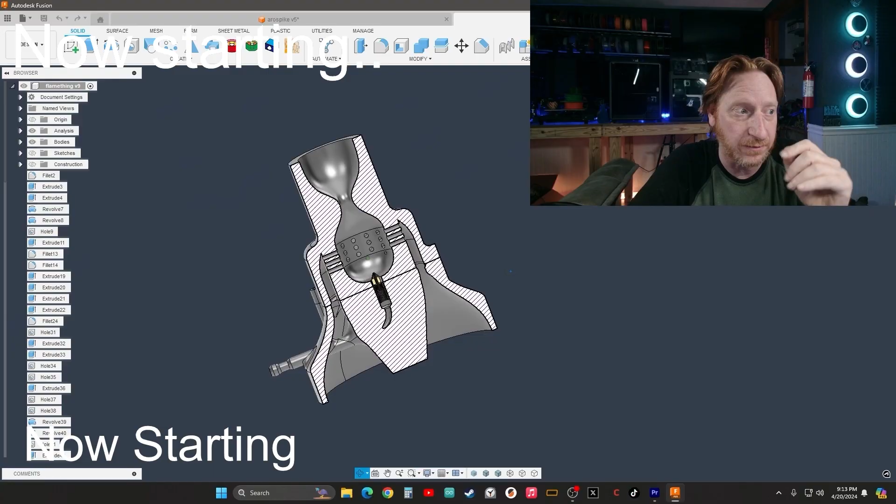Nozzle heats up and the plastic it flows, a creation takes form as the live stream goes. Heart of a maker with a tech-savvy show, designs in the making, see the hotbed aglow. It's shenanigans 3D on the digital stage, with each layer printed, he's the maker, the mage.

Spinning gears, let's start the show. Layer by layer, we watch it grow. A twitch in time with shenanigans flow, chaos reigns with a fiery glow.

Closely as the filament spins, a wild ride where the line between fails and wins. Accidental art when the plastic rebels. Shenanigans 3D, he's breaking all the levels, on the edge of tech, where the sparks may fly. In the streamer's den, there's no limit to the sky.

Every stream's a gamble, roll the fiery dice, pushing limits, bending rules, not one to think twice. Heartbeat pulses with each bridge he creates, while the chat's wild wonder in suspense they wait. Rising with the flames in the shenanigans game, printing out the future, no two prints the same.

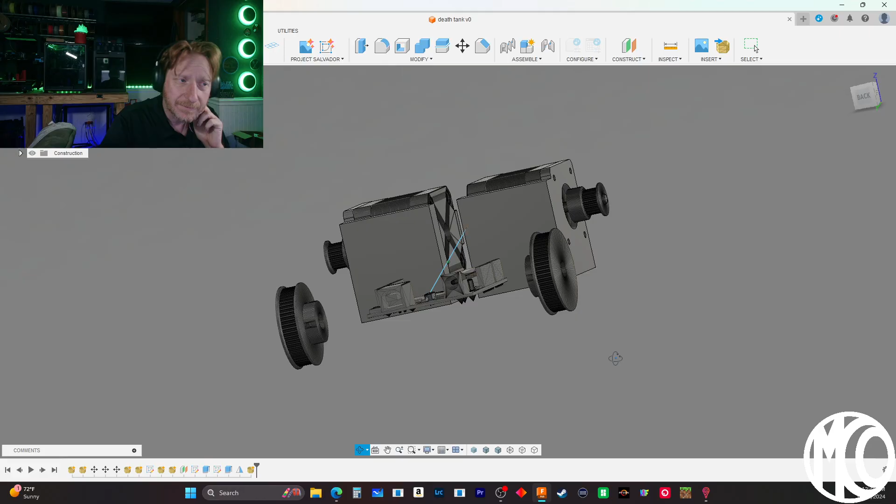So there's two variants I want to do here. This will be for the stepper. I don't know if we should use steppers or not. I'm questioning if we should use steppers for the drive system. Like, what's the point of the stepper? The point of the stepper is to be precise, to precisely control a motion, right? You really can't do that with DCs unless you have some kind of a reader on it.

So using a stepper for our application here, is that extremely overkill? What benefit do we have with using a stepper for the drivetrain? That's basically what we got to figure out.

We could use... let's see if I can... I really wish my homepage wasn't full of celebrities. Junk. Let's try, let's see here, 93. Oh, I don't want to take that whole thing. Pardon me. So what if we use something like these?

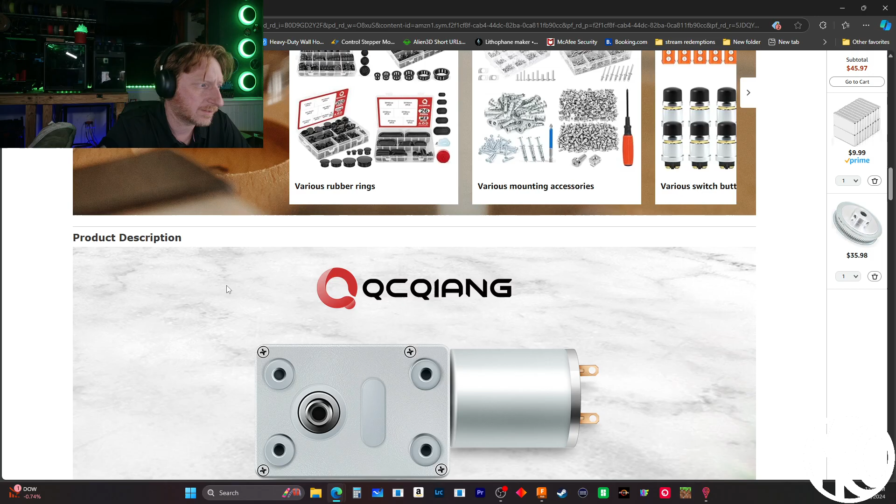I know I want to get... I don't care about packaging. I want to see what we could use, one of these, two of these. I want to know what that shaft size is. I want a description, please. There is no description.

So we can get two of these for 20 bucks. It's not bad.

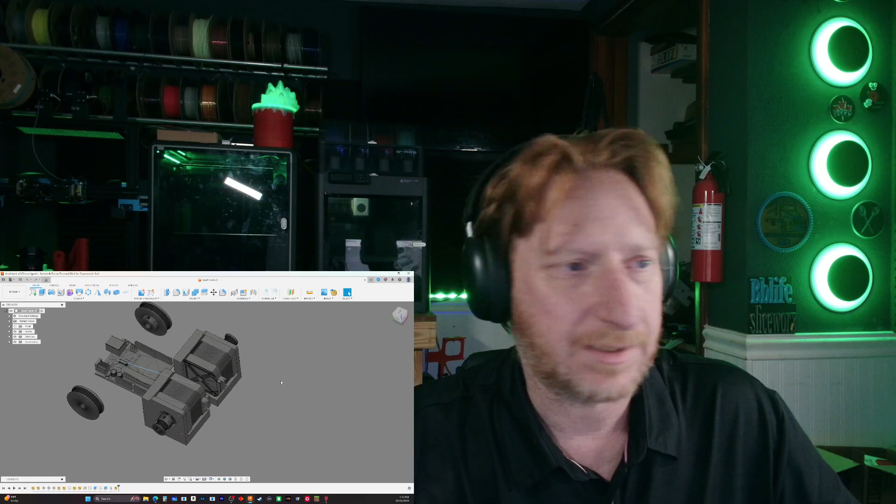We need to go to the big screen. We're gonna need to change things, aren't we? This whole design completely went wayo. So we're gonna start a new design, I guess.

Yeah, I tell you what, you don't even want to know how much I spent on this train layout a few years ago. That was ridiculous. I didn't hold back. It wasn't some kind of toy thing.

It was a full-blown model train layout, hobby level. It's all on my YouTube channel, there's several videos of me putting it together. Those trains are not cheap. Those locomotives are like $200+ each, and I got 2 of those, and the track for the trains I probably had maybe $150 worth of just track. It's just a simple train crash channel.

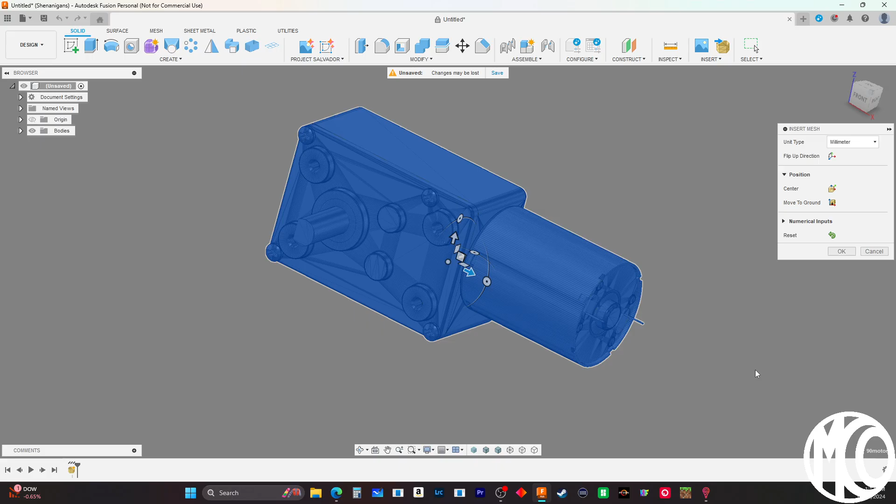Okay, I think this motor's shaft looks like it's centered. So we got one centered here. Let's move.

Do 300 in sales a week in January. Yeah, oh God, I don't know how you'd live off of that. Definitely have to save throughout the year for that, huh?

Oh, we're centered, yes we are centered. Let's go for the top view. That's our right, that's front. So if that's front, this needs to be changed here to 90 degrees.

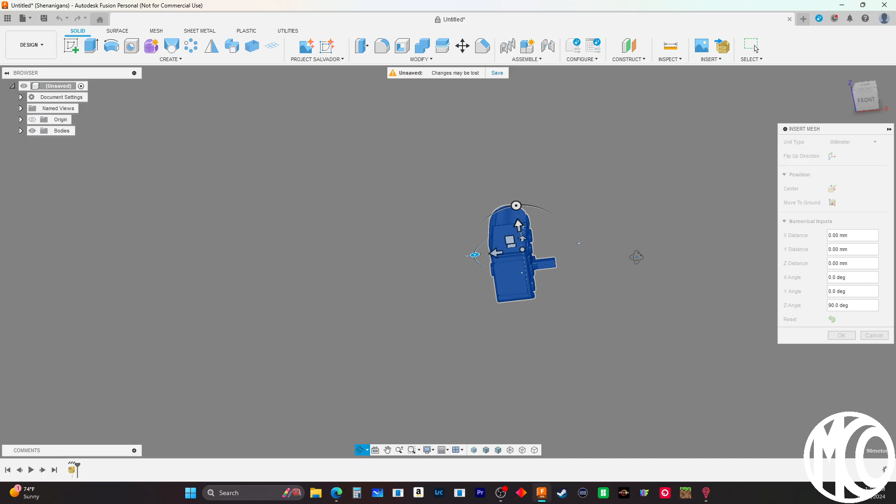Wait a minute, I'm getting confused here. Because we're not using belts now, so this needs to be like that. It needs to rotate this way.

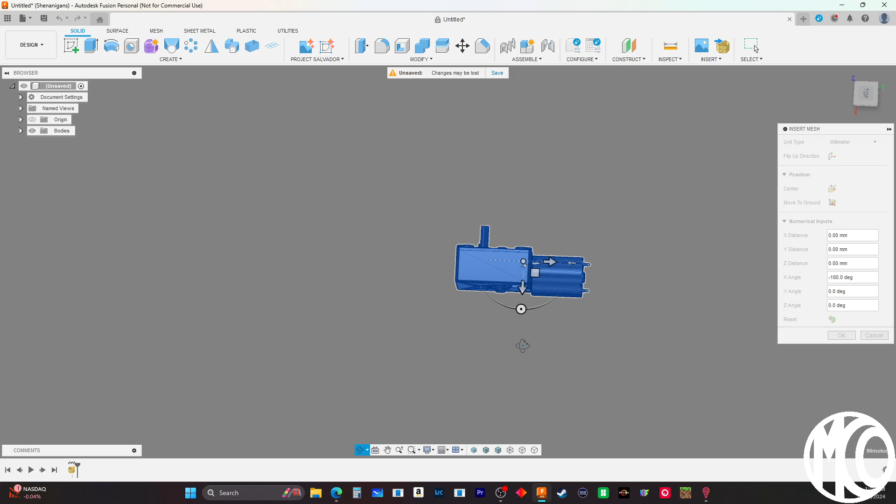Yeah, I do the same thing too, I prepare for downtime, which is what I'm doing, like what I've been doing these past few months. This last month I've been preparing, usually October, November, and December I start preparing. That's why I keep saying budget's a little tight right now.

All right, what am I doing, I'm confusing myself here. Oh, this needs to be this way. That's what it is.

Crops didn't do well for you. Humbler John, my friend, how are you? How was your weekend? Yeah, unfortunately, we didn't make it down that way.

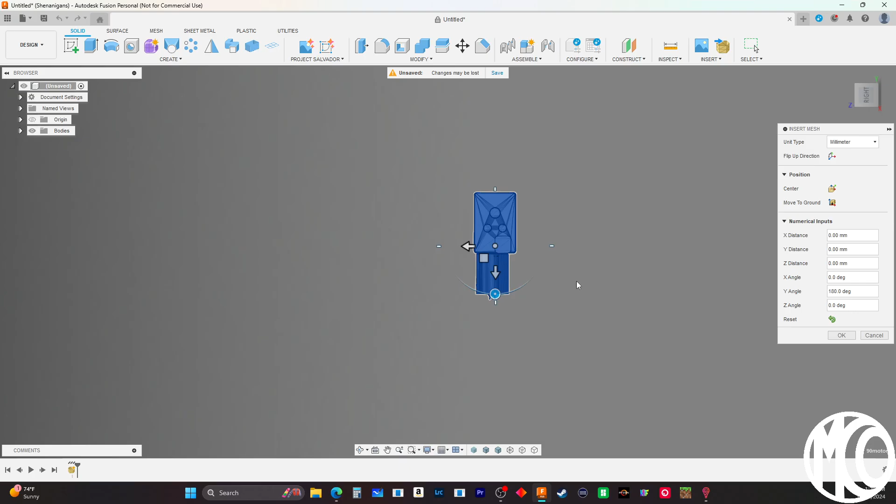Okay, so there, we're good on that. Let's move this over. Let's move this 40.

Oh, Rexy, hey, how you doing? Still 3.5 hours away from Atlanta. Well, have a safe trip, I hope it was a blast for y'all.

We are redesigning - this is the third design now that we've done for our tank, but this is a community effort of parts and electronics, and this is what we're going to be taking around to shows for 2025. It is an absolute blast. That Ren Fair, behind the Ren Fair there is a facility, and it's one of my customers I go to. That is awesome, glad y'all had a good time.

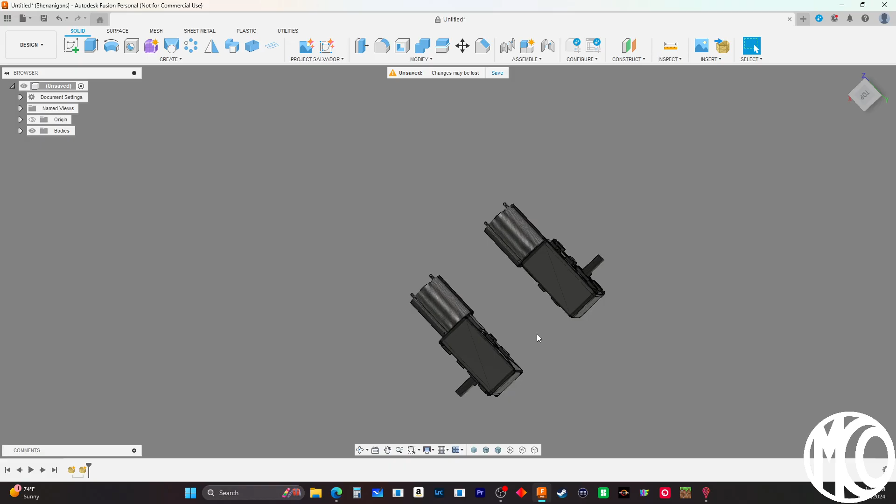Yeah, I kept getting text messages from their Discord saying that people need rides. Someone needed a ride to Philly to catch a Greyhound, and it's like, yeah, I've been there, done that.

This is going to be interesting to figure out how to mount this. I guess we have screws here. So what's our distance overall from shaft to shaft? 121 millimeters. Let's get a spring up, GrabCAD again.

And this, download the Raspberry Pi model.

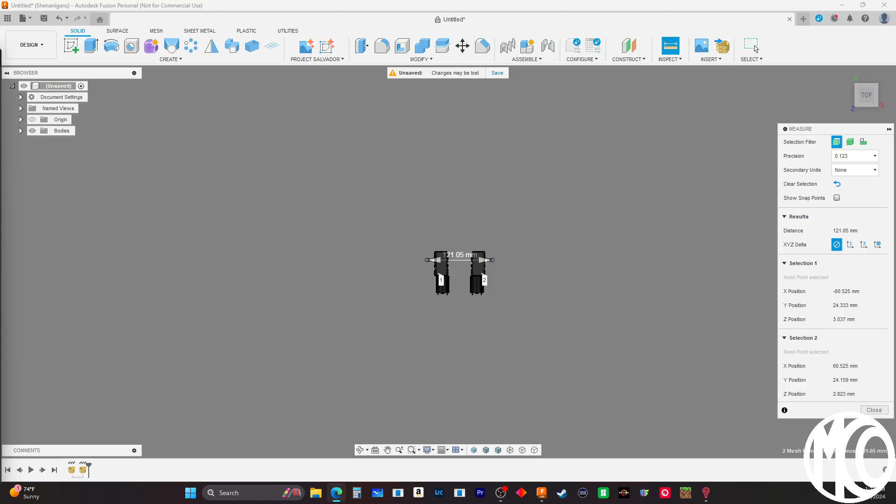This will work. I don't need anything fancy. I just need it to.

Printopia is your goal for next year, huh? I'm gonna have a table next at Printopia. That's the idea, it's a plan. Share a table with Billiverbot. There's talk about that, so we'll see what happens. I would definitely do that.

To Raspberry Pi 3, and this is one of the reasons why I want to get this done, so we can take this there. Open this file up.

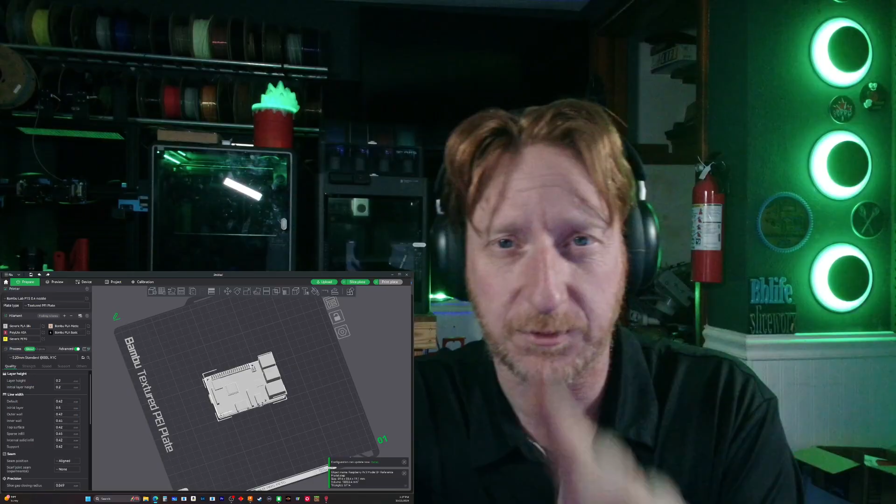How much is a Raspberry Pi 5? I was looking them up, and I was finding them for around 60 bucks. 60 bucks for the Pi 5, and then for the AI hat was around $60. Here, let's look it up. If you go through the Raspberry site, whatever it is, versus if you go through Amazon, you're paying like $100 for it.

Yeah, if you... where was I seeing that at? Here's $80 for one. DigiKey has them for 60 bucks right here for the 4G, the 4 gigabyte ones. That's the one that we're looking at, that I was thinking about getting.

The other thing I want to search is... yeah, this does not look like what I was looking at before, but maybe this is just the bottom model, I don't know. But here's 28 bucks for this Seeed powerful RISC-V-based hat, it enables AI in Raspberry Pi, and it's ideal for AI vision projects.

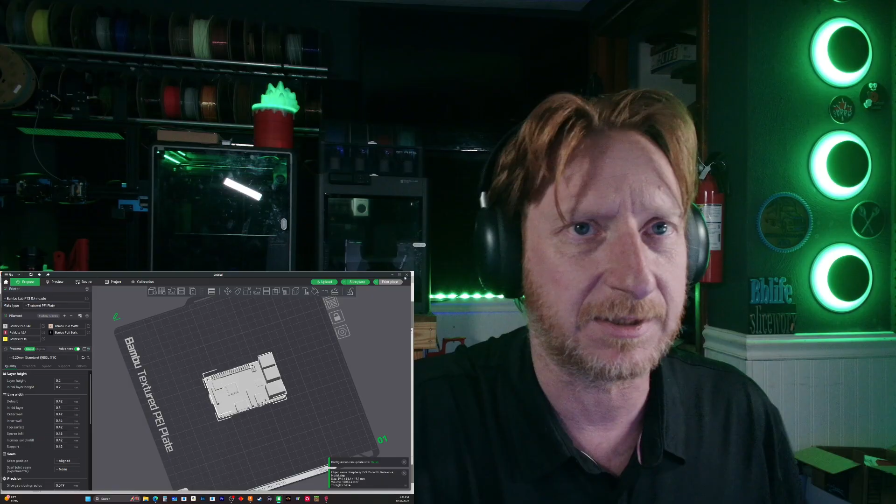You know, I thought those LiDARs were going to be very expensive. I found one for $50. That's still quite a nice chunk of change - two rolls of filament, possibly three. I thought they'd be like $200 or $300. Just five years ago they were like $100K. I know, right? I found one on Amazon, I don't know how good it is. I do use LiDAR, I've used it before. I got some on my quadcopter actually, so I've played around with it and it does work.

Oh, so here's a LiDAR module. It does work - I can hug the ground when I have this turned on. When I'm running autonomous with this on, it'll sit there and actually follow the terrain. There's a slight delay, but it'll follow the contour of the fields, going up and over. Oh, my cat is in here. Hi kitty cat.

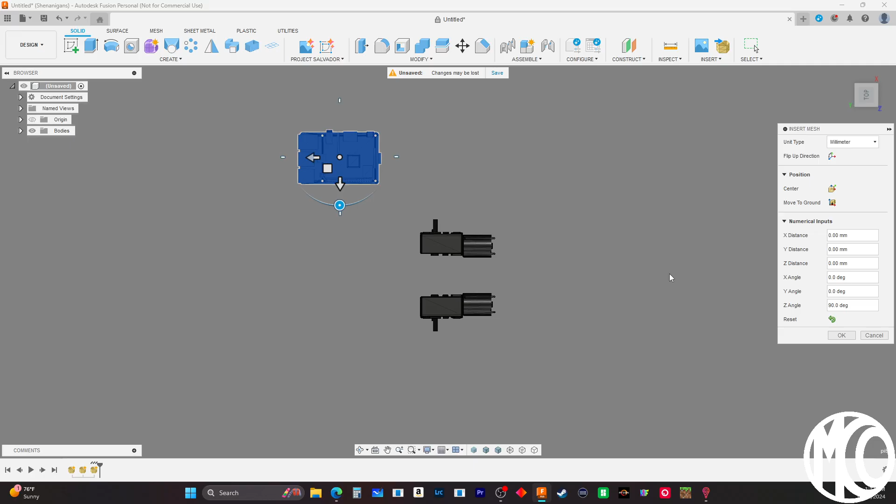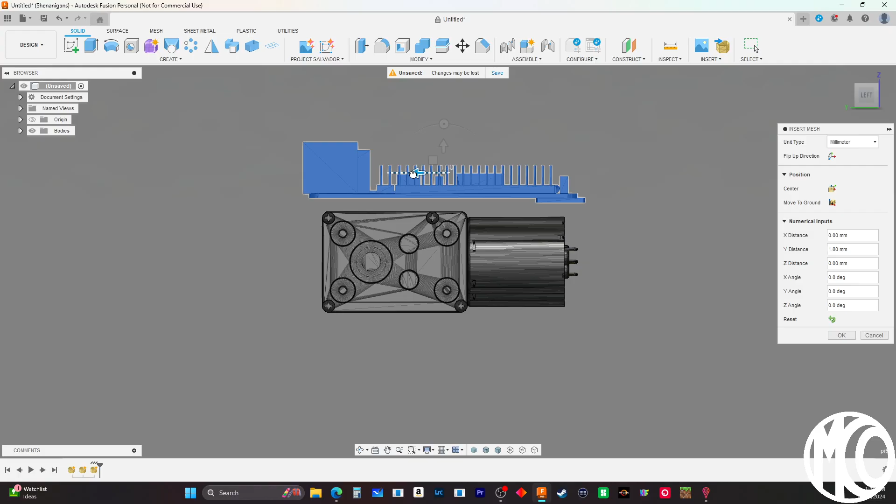I guess we could have the motors mounted on the bottom. We can raise this up, have a mount up here. The motor - this is one thing you've got to think ahead about when doing these designs. Now, I'm not an expert by far, just a truck driver that comes home and plays on the computer, streams it, and prints it.

But you've definitely got to think ahead here, because if we put something here to mount this, and this is the bottom and these are the sides, we can't just put an object right in this area to hold it up. We'd have to make sure it's small enough to allow these motors to move out this way and then back, because that's going to be underneath. We're not going to be able to pull these motors straight up because the shaft goes through the body right here. So when we unscrew this, the motor needs to be moved inward and then removed out like this. You've got to think ahead like that.

I was watching this one YouTube guy maybe a year or so ago who did that exact same thing, but with a different style of motor. He designed everything, put it together, 3D printed the body, and then couldn't get the parts in place because he hadn't allowed for what I was just describing. He wasn't allowing for that, so he just designed it, and then had to completely redesign the whole thing - he showed it too, saying 'I messed up' and showed what he did.

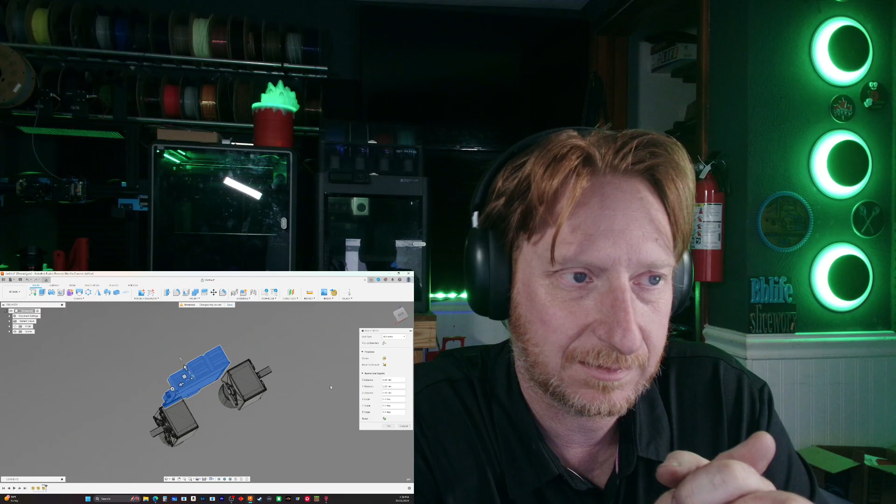Yes, I think we did. Why did we move away?

We didn't really fully move away, I don't think. Maybe we did. Why did we start designing this? Oh, we were talking about the advantages of the stepper. What is our... I know it's a Monday. All right, it's just a Monday. I haven't had much coffee.

What is the advantage that we have with a stepper as the drivetrain? Besides me already having them, what would we benefit from it? It would be precise. What would we benefit from it, though? Oh yeah, definitely highly accurate. We'd be able to park this thing anywhere.

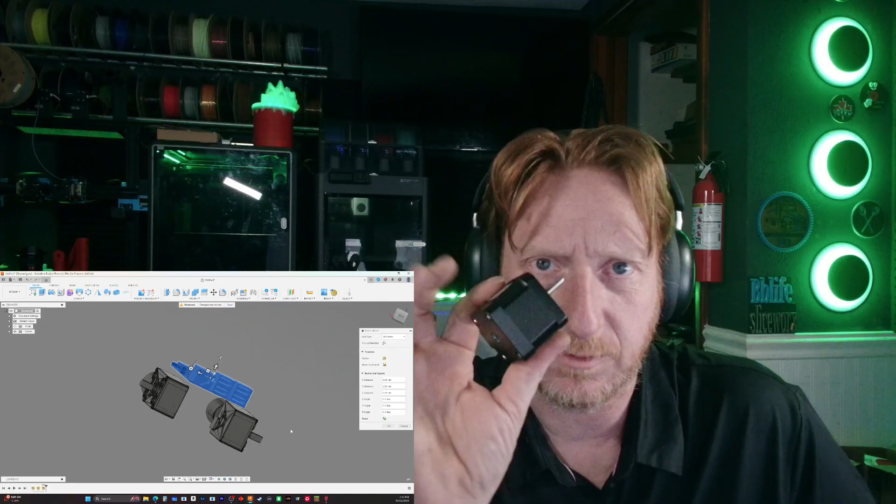One thing I do see being beneficial if we use this with the robotic arm, since the robotic arm does not pivot at all - all it does is fold up. Basically, think of your shoulder as being precision control. Precision control is what we would do with this.

So the robotic arm is basically going to have two arms on it. It'll move up - we'll have the boom that goes like this, then we'll have the boom that goes like that, and then we'll have the grabber. The grabber will be able to go up and down like that, sideways pinched like that, but able to go up and down.

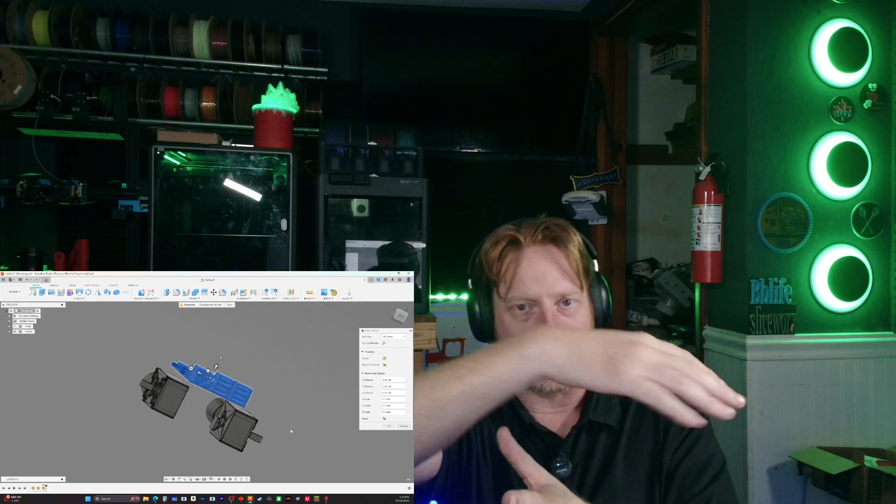In order to move that robotic arm to pick up a can that's over here, we'd actually have to turn the entire body of the machine, because the arm's not going to pivot. So the entire body needs to turn, and that's where the steppers would come in awesome for that - we'd be able to precisely move that.

If we go this route, we would lose that precision. And then our motor shield - one of the motor shields I was looking at, one of the H bridges - the H bridges I've been finding will control 4 steppers and 2 DC motors.

That bridge will work on this model right here that we have in front of us, because for our arm we have 1, 2, 3, and the pincher 4. The arm will have 4 steppers on it and 2 DC motors, if we go with these motors right here that we're working on.

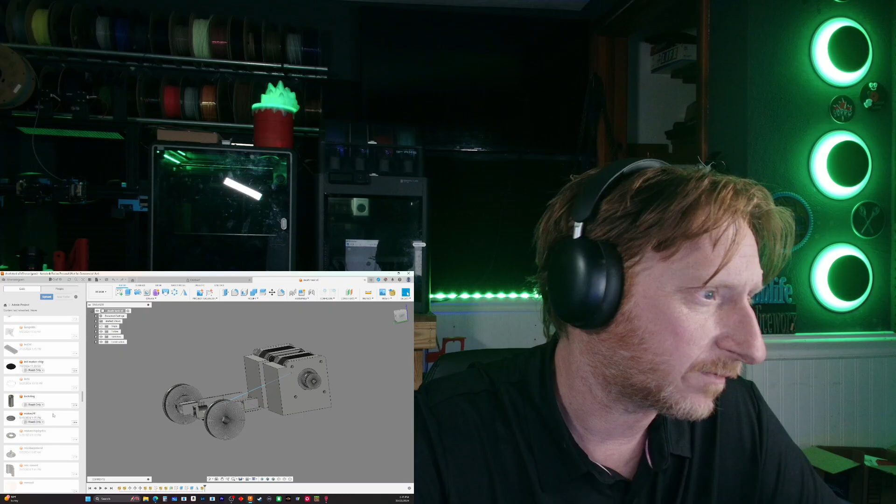If we go back to the Death Tank design, this one right here, okay - the one that we started with. Oh no, this is the second version. Where is the other version? I'll show you the first version we started with. So this is version number 2. Here. So this is the first one.

And I was going to use these little guys, but then I know for a fact that these are not torquey at all, because I can stop them easily with my hand. Yeah, more torque means more weight. Yeah, that's just like a bigger battery equals more flight time, but it also adds more weight, which reduces your flight time on anything like quadcopters.

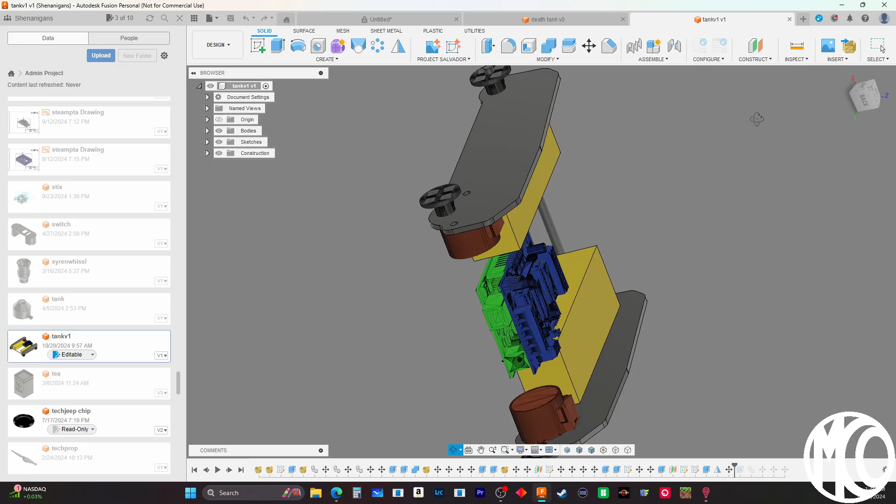So yeah, this was the very first one that we started, and then I started thinking about it - it's like, no, I don't really like using those. And those are the batteries, but yeah, I don't really want to go this route. So then I started working on this - this is with the steppers. Now the steppers are going to be reduced, so we do have a reduction here. And actually this one, which we just started today, uses that.

Should we go with the stepper motors? What do y'all think? All right, let me...

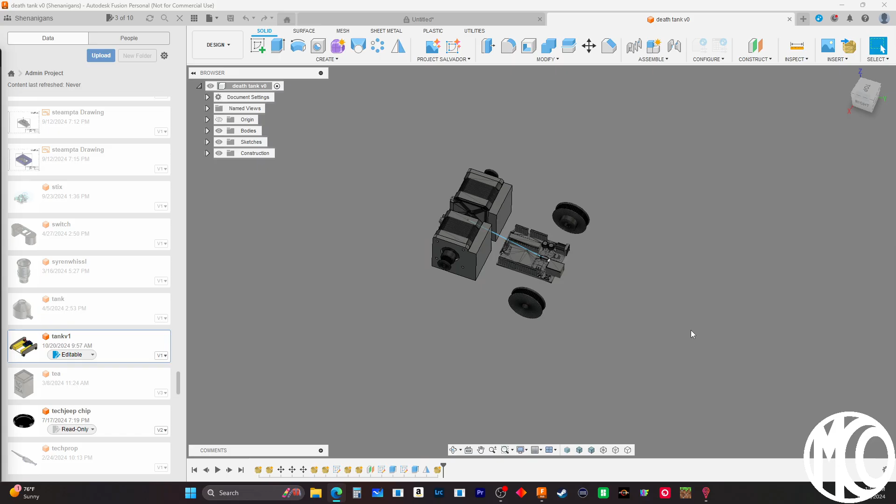So we have a current poll, DC or a stepper? We'll let that run and check what y'all say. But I think what we should do right now is something that's bugging me. I wanted to put a belt on here, and we will do a belt.

We should do the belts. Let's get rid of all these bodies so we're not confused. Got that pulley and that pulley.

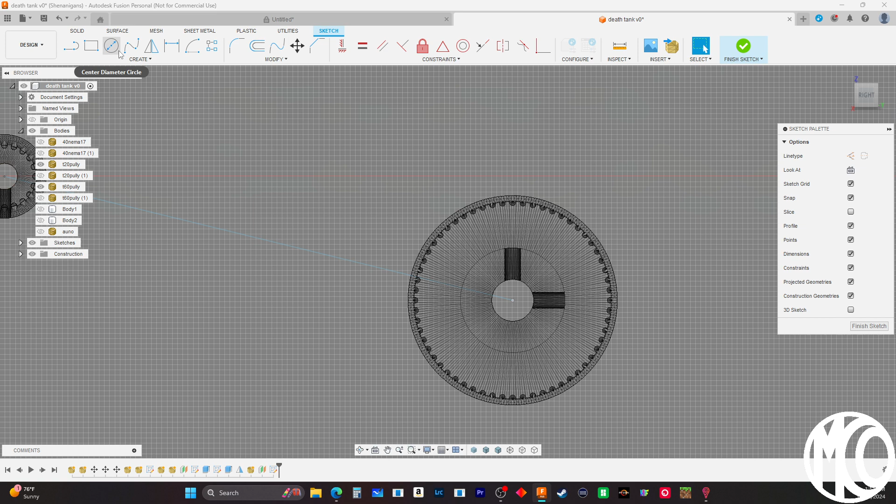Okay, we'll design the belt. That's good enough.

I'm not really sure how to do this, to be honest with you. So I think I want to run a parallel line from here to here.

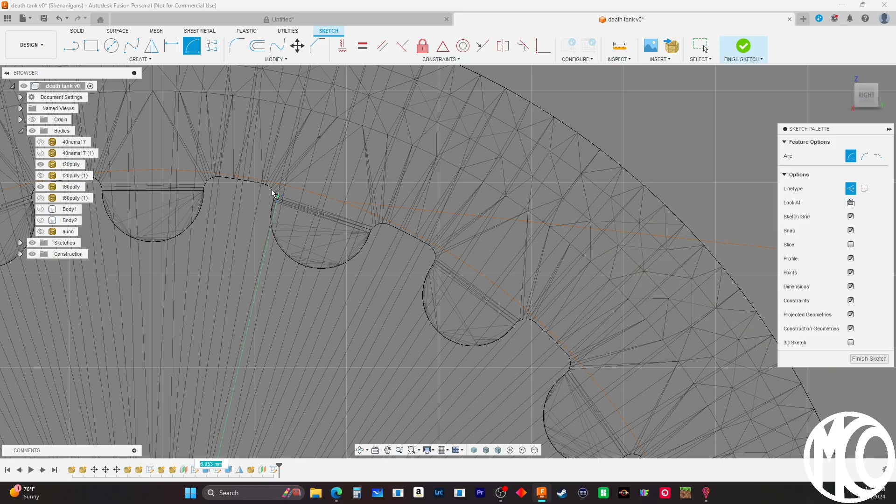We're just gonna fudge it. We're just gonna eyeball it, that's all we're gonna do. I'm not really too concerned how it looks, I just want it to be in there for aesthetic reasons, I guess. So we'll do that down there.

That was supposed to be, let's backtrack on that. And this is this.

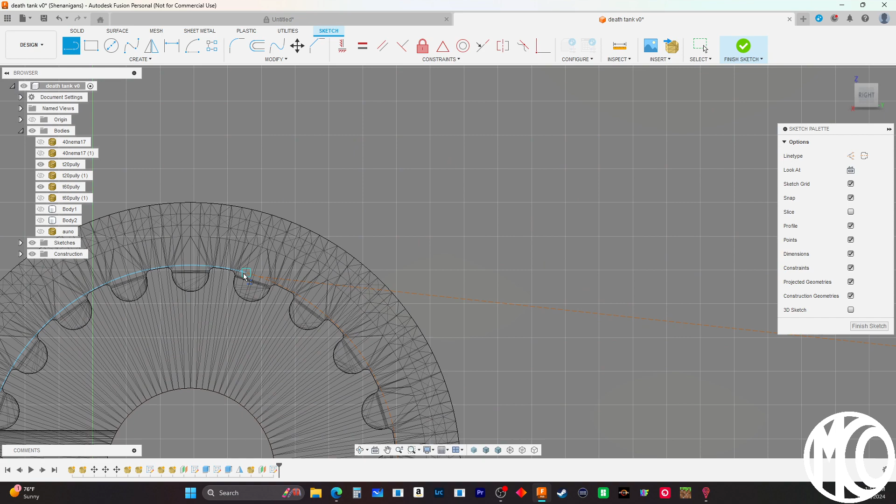We could do the math to do it and make it look right, but yeah, see, this needs to be moved up.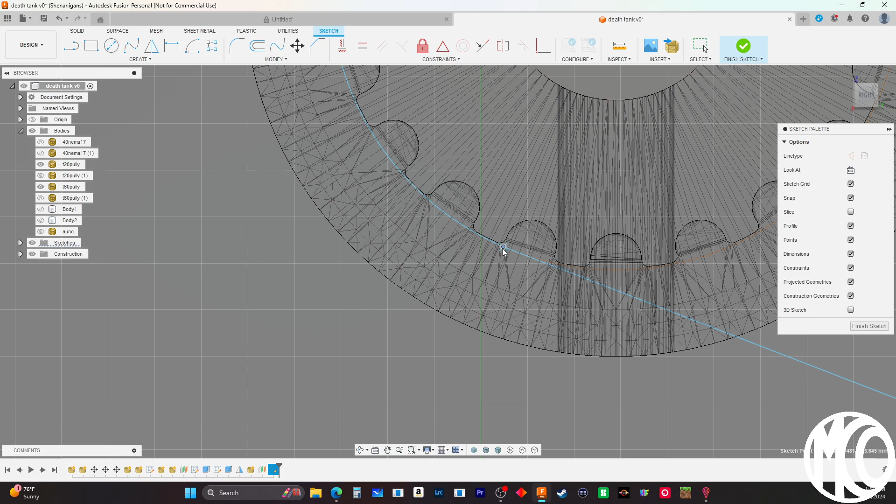Well, that looks good, huh? So now we'll do the bottom one. That one looks about right. That works, huh? That works.

So now let's take this and we will flip it. Right, okay. Finish the sketch.

Make this at 6 millimeters because I think they're 6 millimeters. Hit OK. Yeah, that was easier said than done. That will work for our demonstration purposes. We need to make it black though. Rubber.

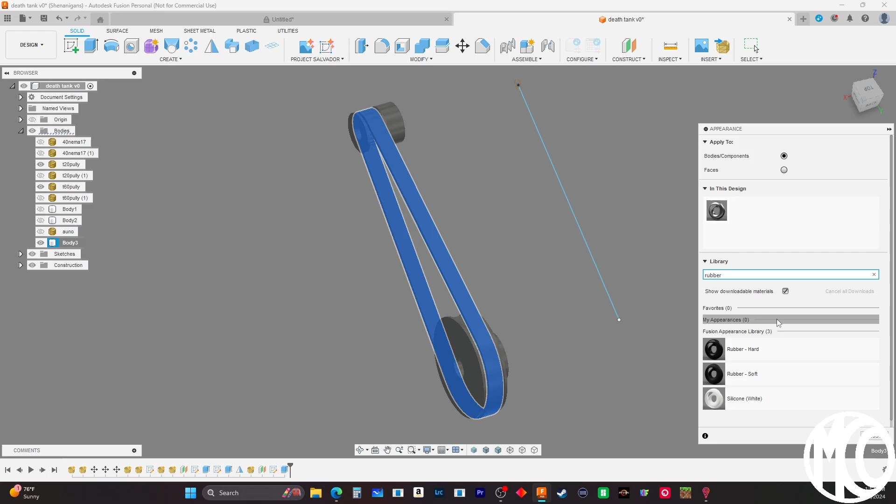Now we're going to take and mirror this. And now let's bring everything in. Cool. That was actually quite easy to do.

So now we do have. So doing this will actually make these steppers torquier. I just don't want this thing—no, I want this thing to be able to go outside. It's not going to be an indoor thing. It's going to be full blown outside, going up through grass and bushes and brush and everything else. So that's why I want to make sure we have torque on it. I don't want it to go up a hill and stall.

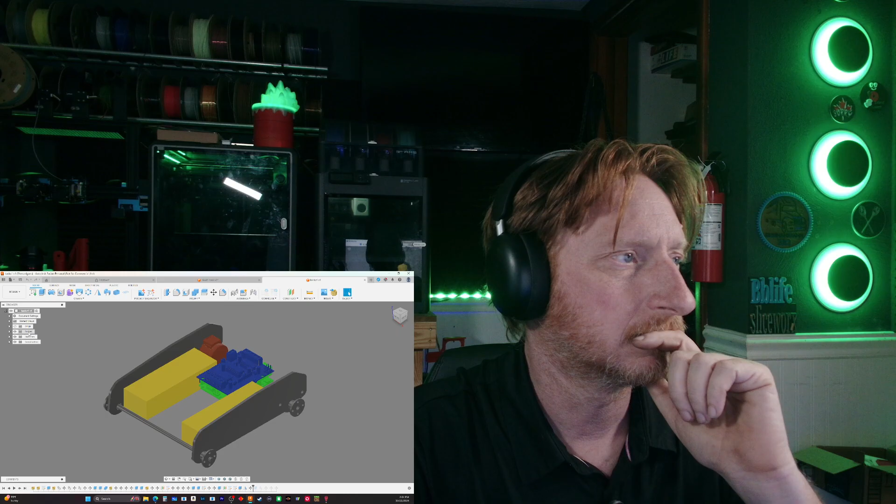There is a way that we can import this. We got to export that and import that. So let's cancel that, we'll go back to our tank. From here to here is what?

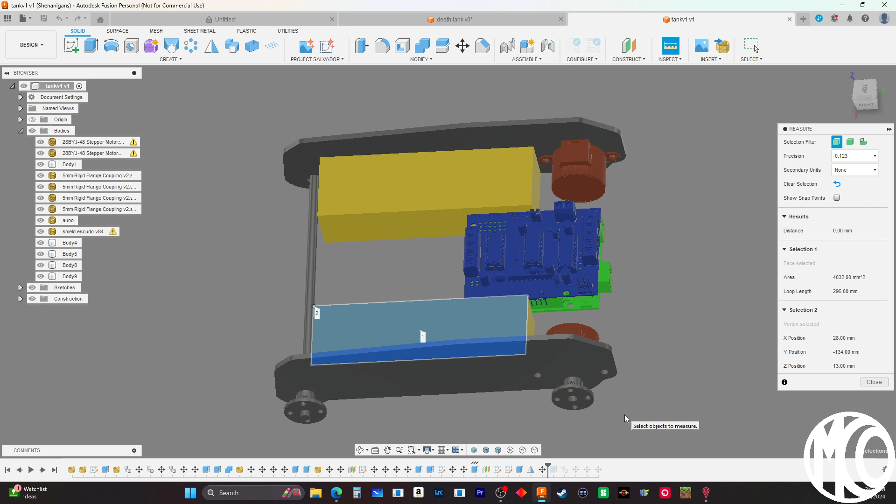Okay, that's not gonna work. Let's save this. We'll save this as tank bot DC.

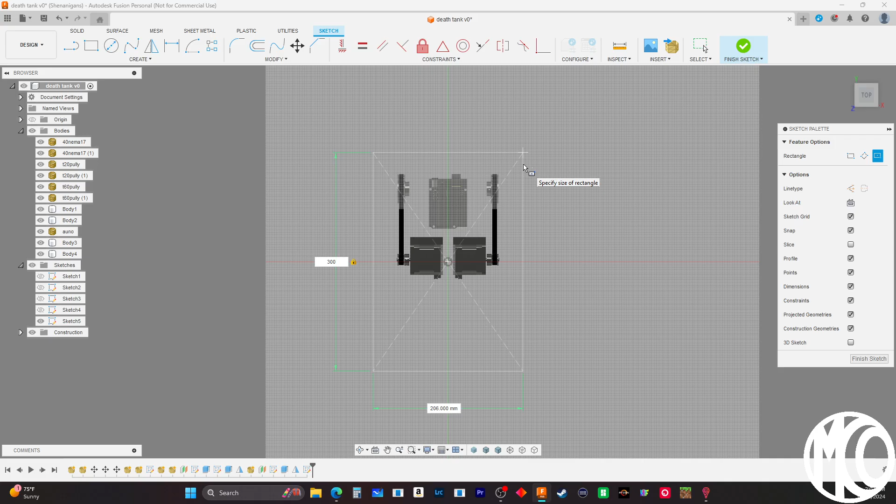Oh, our batteries, that's what we're trying to figure out. We're trying to figure out our batteries. What is the overall distance of it? Let's do the top view of this. We can print this on the K1. So we can do 300 by 300. That'll give us an idea of how big this is going to be.

So this is the back of it, so we can move that back more. We have more room up here. This is 100 millimeters from here. Well, it's not 100 millimeters, it's 100 millimeters but it's offset. It's angled, so from the center point here to the center of this axle, that's 100 millimeters.

That is a 300 millimeter belt. The belt does have to have a tensioner here. So the belt's actually going to come around, wrap around like this, and then come up to get rid of the slack. And there is going to be slack in that belt.

I found a cool online calculator that calculates your belt length. All you do is type in the diameter of your pulleys and the distance between the pulleys and the center of the axles, and it will calculate the size of belt you need. For 100 millimeters, a 300 millimeter belt will work, but there's going to be some slack, and we're going to put a tensioner in here so we can bring it down.

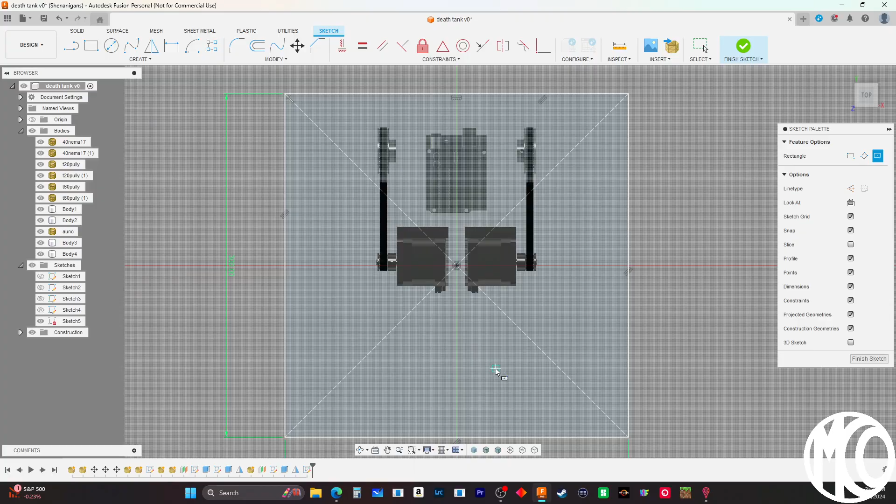But I really don't want to print bigger than a 300 millimeter build plate. I want to keep the body within a 300 millimeter build plate. So I want the body to be printed as one. And I think this would work if we have.

What do we have from the center of this? That looks like to be about the center to where our front axle is going to be. So it looks like we can go roughly 225 millimeters. And we still have plenty of room. We can go 250. And that's about 25, so we have about 75 more millimeters to play around with.

Probably maybe more like 60. 200 millimeters. I'm looking at the build plate. What do I have that's 200 millimeters here? I have a piece of tape.

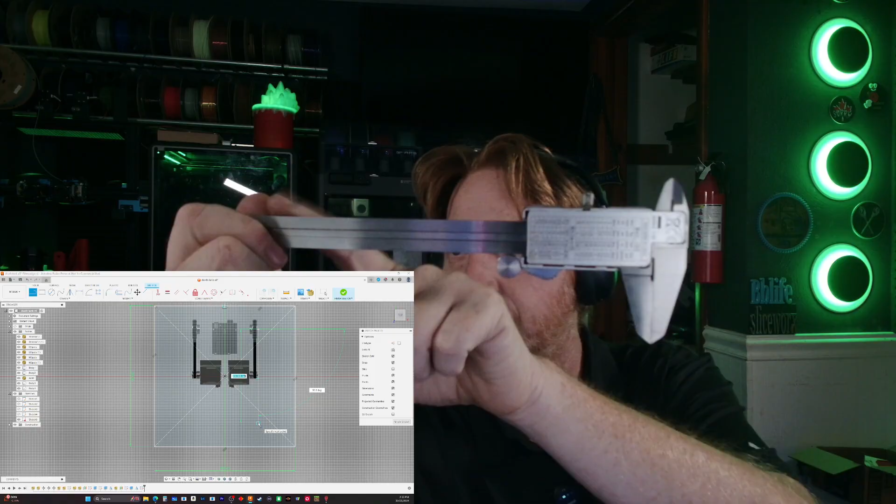I don't have my overhead camera on, but let's see if I can. So from here to here to where my thumb's at, that's only 200 millimeters. And then this is basically going to be in the center of that. It's got a small little thing.

Right, so let's try this. How wide are we going on this? So from there to there, it's roughly 143.

Digital Dragon, my friend, how are you doing today?

We are working on an AI, it's going to be an AI-driven rover for Murph to take out the shows, which is going to eventually be turned into a death racer. Somewhat, we got a couple ideas of what to do for a death racer. We might do a collab. But this is going to send us down the path of a death racer. Living the dream, huh?

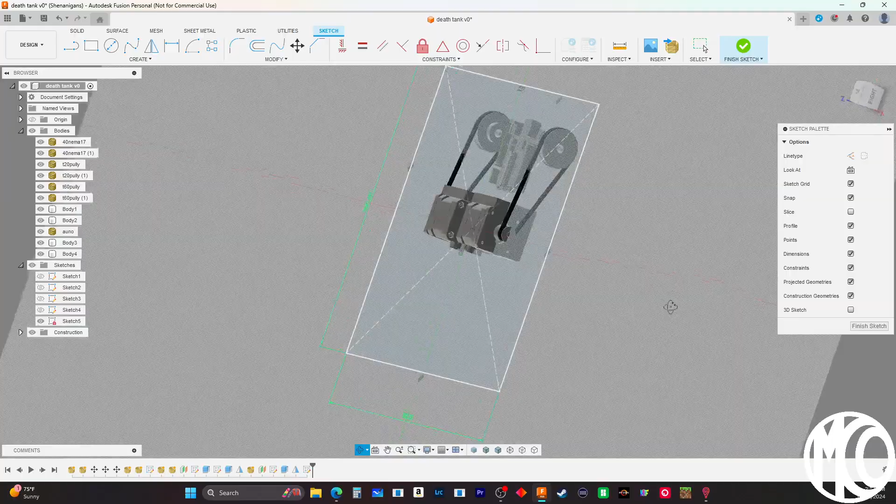So this is our machine right now, and this is a 300 millimeter build plate. So when I do these, I like to do an outline of the build plate so we can have an idea, because I want to print this all in one, right? I want the body to be printed as one. I don't want to sit there and have to worry about weak points assembling it.

Yeah, that'd be pretty sweet to have a rideable death racer. Yeah.

I just need to wire mine up is all I really need to do. The only thing I'm really using for this build is the two steppers. That's all I'm really using out of it, and then.

Yeah, I have another project for a coil winder that's going to use another stepper. The two steppers are on there, but the steppers that are on there now are from when I was trying to do the 5-axis, so those are steppers from the original one. So I don't use them for that, they were just added on by me. I got a bunch of steppers laying around.

But basically what I'm trying to do is I got way too much stuff. I have way too much stuff that's just sitting around doing nothing. Like I got boards all over the place. I mean, I got a bunch of boards, I got steppers, I got drivers, I got all kinds of stuff. Bearings, axles, all kinds of electronic things like that, just in all these boxes here.

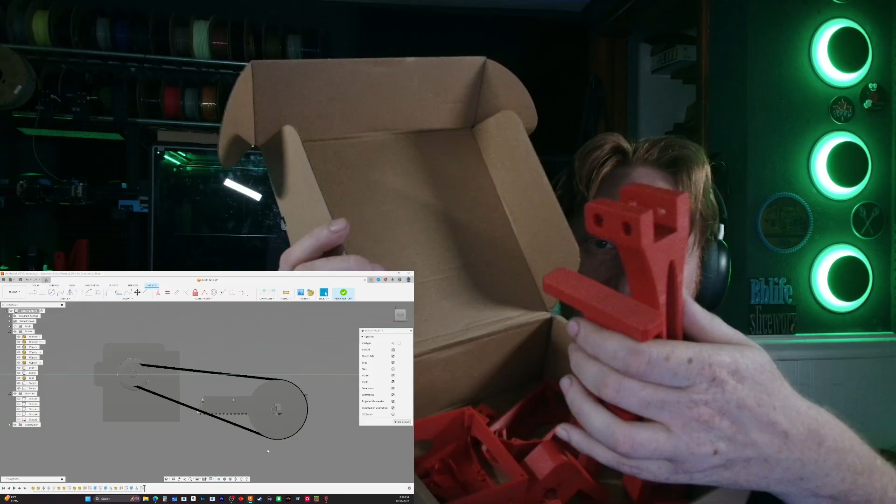I was printing with that because we do have a project right here that needs to be put together, but I need to order some bearings and stuff for it. So this one here, this is that Red Galaxy, or Galaxy Red ASA from Polymaker.

This project is all fully printed now. I have about 90% of the parts, the electronics. This is a coil winding machine. So that is going to be used. We need to get that together so we can wind our coils.

This is getting redesigned, this is our brushless motor. This is getting redesigned where these stators come out, and then we'll be able to put them on the machine, and we'll be able to CNC wind them. And that's what this is, this is a CNC winding machine, and then we'll be able to wind it. And then once it's wound, we'll be able to put it on here and attach it. So then we can get that going, we can get our brushless motor up and running.

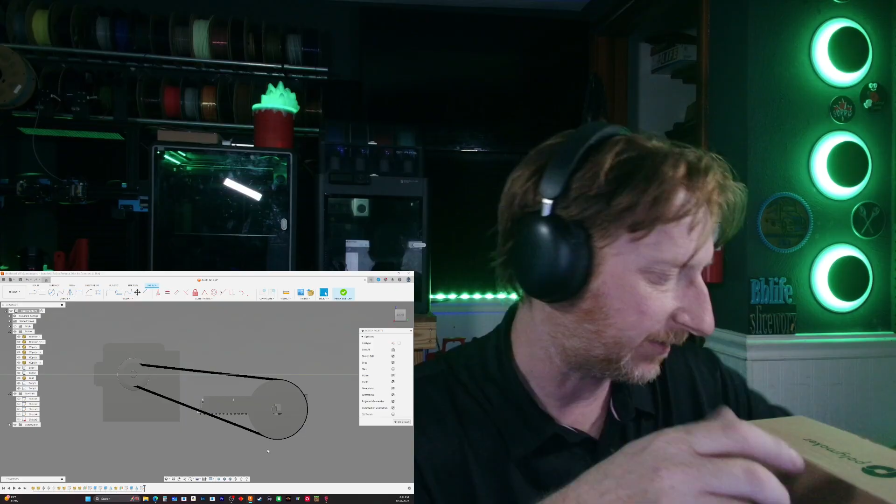It's been throbbing today for some reason. So yeah, that's my new goal now, is to work around with the stuff I currently have, so I don't have to buy new stuff.

Now this robotic tank destroyer thing that we're making right now, we are going to get - I'm leaning towards Raspberry Pi. The new ones, I already have Raspberry Pis, but I'm leaning towards the Raspberry Pi 5 with the AI camera on it, for obstacle avoidance detection and stuff like that.

We are going to be running 360-degree LiDAR around it. I found a LiDAR system that rotates, and that will be placed up on top of this as well. I want to see what the size of that is, if it will fit into our current build. I think we might have to make this thing a little bit wider than longer. That's the goal, is to start making stuff off of all my existing electronics.

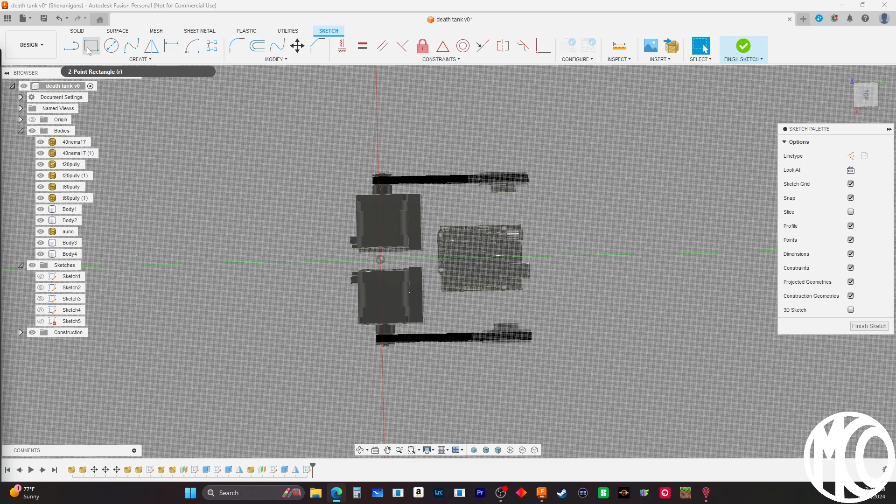What is our model? That would be placed about back in here. What did I say, 101? Now that's rounded up, so that would definitely fit within our model. What's 2.5 inches? It's 63, and obviously that was 70.

So we definitely, so if we go 104, 102, and the object you're creating is not visible. So that blue, we definitely have space there. This obviously will be up in the air, like it'll be up, but that will definitely fit within our structure, our body. Cool, okay, so that will work.

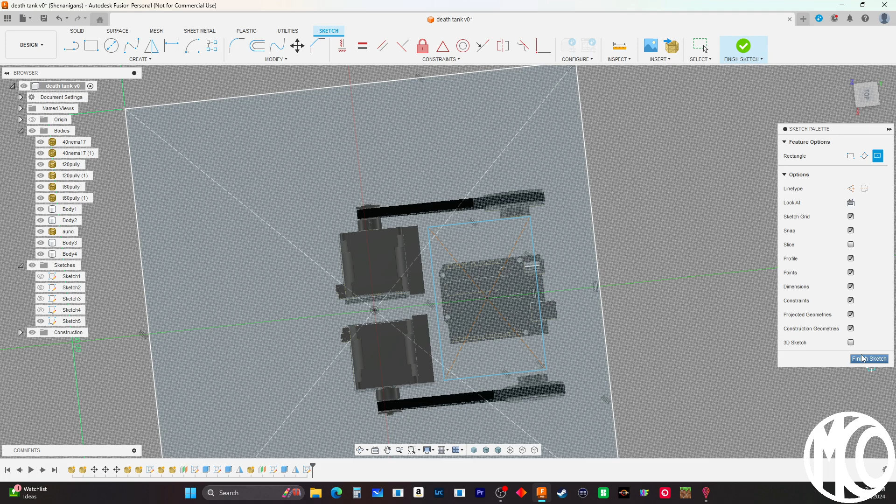I guess now it just - oh, we need to do the batteries. That's what it is. Finish this sketch here, we turn that sketch off. We need to finish the batteries. The batteries, we will work off of this. The batteries are going to be up front. Now, the batteries are going to determine this length of this, basically.

Where's my calipers at? So our batteries are - I don't know who you are, stop calling me. Volume off, that's how you handle that.

Okay, so our batteries with the tucking of the wire, we're looking at about 120. 120 by what? 120 by 35, and I'm going to leave about 6 millimeters on each side for wiring. That would give us 12 millimeters, so that would be okay.

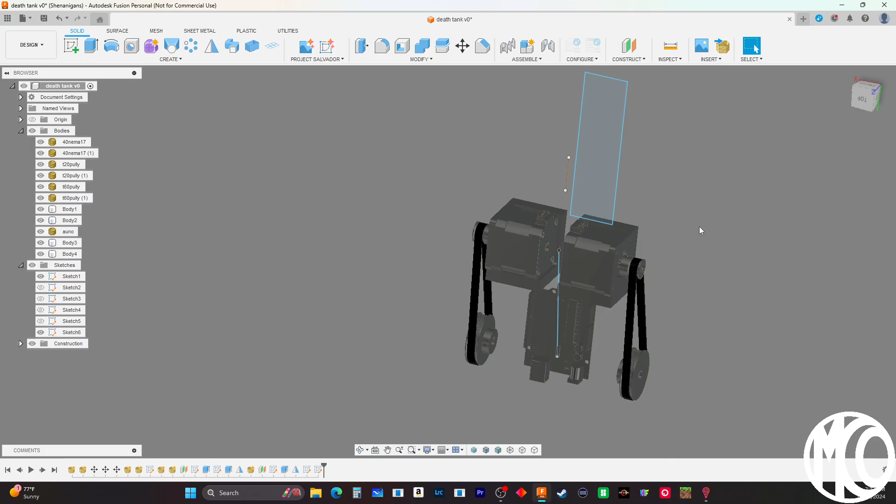And then there's going to be a fan probably up front here somewhere, but there will be 2 fans, one for each stepper, that's going to take fresh air the whole way around the motor. And then we'll have a fan in the back here that blows over all this. So yep.

Let's do - oh, we need the body. What did I say, 30? Symmetrical 30, so we'll do 15. So that's the battery. We're running 2 of these batteries, and these are 2200 milliamp hour batteries, 35C, and these are a 3S. So we're going to be running 2 of these, and with a 35C, we'll have plenty of discharge power to run through here.

This is going to be modular. The idea of this is to build a platform where we have the front of it. The front is going to be a flat plate, and you'll be able to swap things out, swap out different things. Right now, we're trying to get our main components.

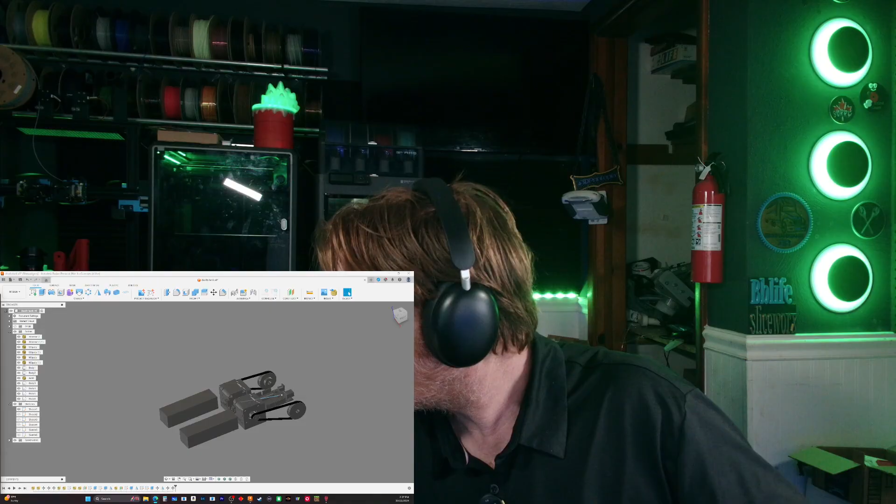I absolutely do that. No, people need to stop calling me. I swear to God.

Just got home from picking up kids from school. Yeah, my son's gonna be home here pretty soon.

So, but trying to find one that has my...

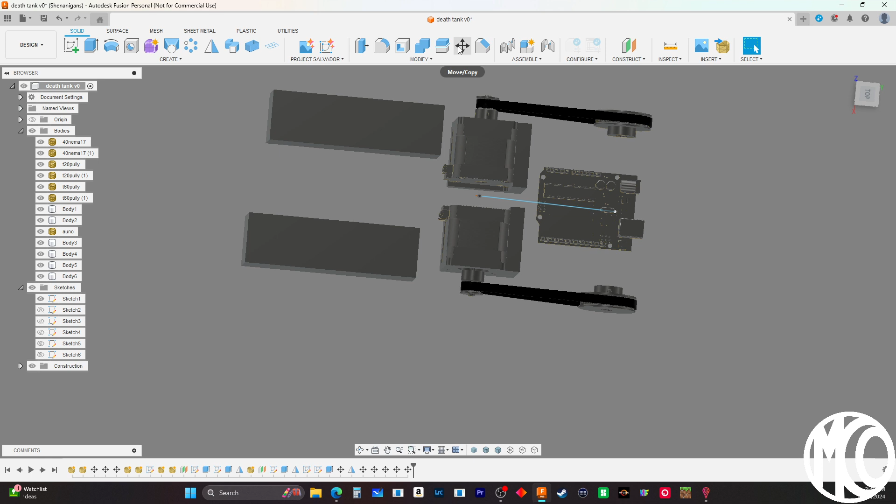Yeah, that will work. Yeah, because I can cut this out here. This here is basically for support. So we can actually put a fan on this right here, and then have this hollowed out, and pull air in and exhaust it that way. So that's something we can definitely do. Move this back 10, so let's move this back 10. That will give us room for any other electronics that we might need to put in here.

Yeah, I saw the prices on there. Definitely way overpriced. I thought the 4000 series were overpriced myself, but those 500s, or those 5000s, yeah, my God.

Oh, I just happened to look over on my other screen here. This is basically what we're doing right here. That's what we're doing. Oh, it's got LiDAR on it too. But we are going to be running the ROS. We are running, yeah, this is basically what we're making. This is like the whole kit for $1,000. Holy God, but that's what we're making. The tanks, the tracks are a little bit different, but that's basically what we're gonna make. We're making like a low profile version of it. But you see how that front, see how the front arm is, we're going to be using servos, or not servos, we're going to be using steppers, or little small NEMA 17s, but that's going to be an interesting build. But that is what we're making.

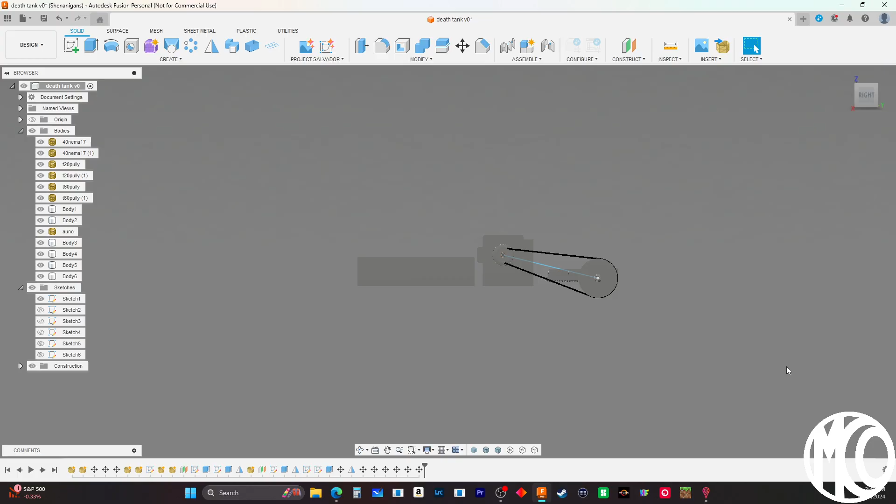All right, so let's do this. We're gonna close this, we're gonna delete that. Let's bring in our Raspberry Pi.

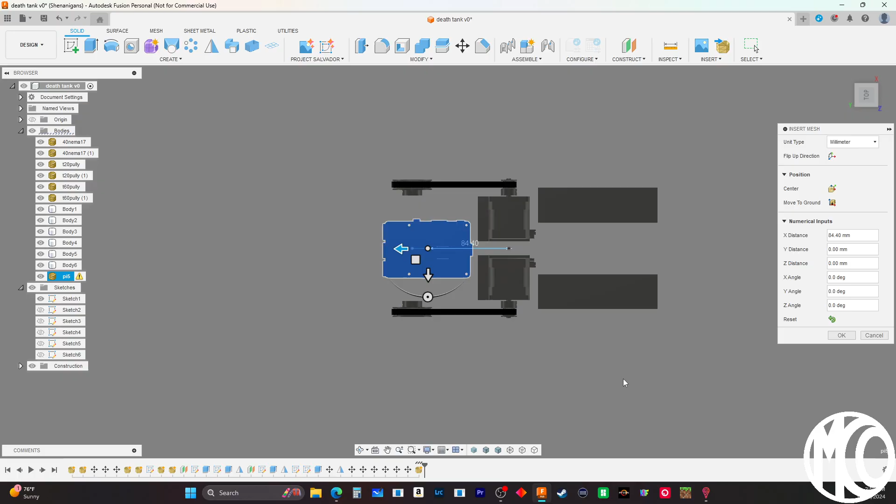I wish there was better lighting on here. So that needs to come up. Actually, no, we can run that down here. And we'll have definitely one stack on here for the camera system. We might have an extension board on here too.

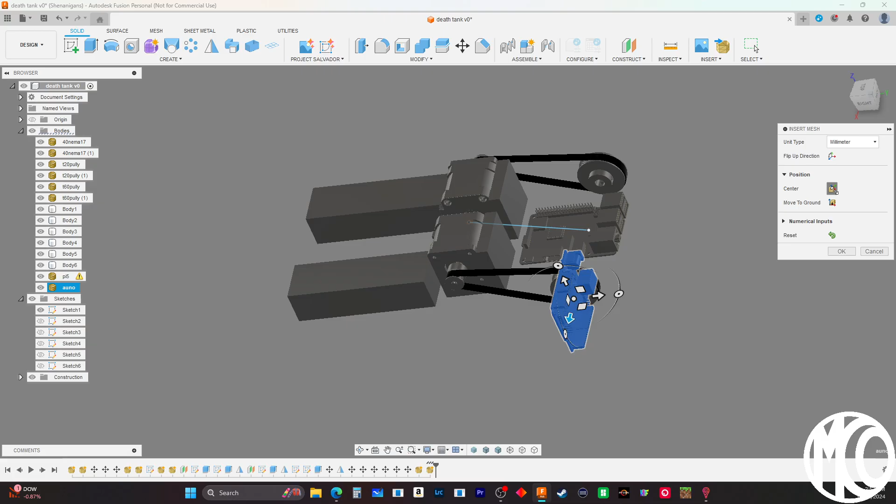We can run. Oh, where are we going to put our... where are we going to put our controller?

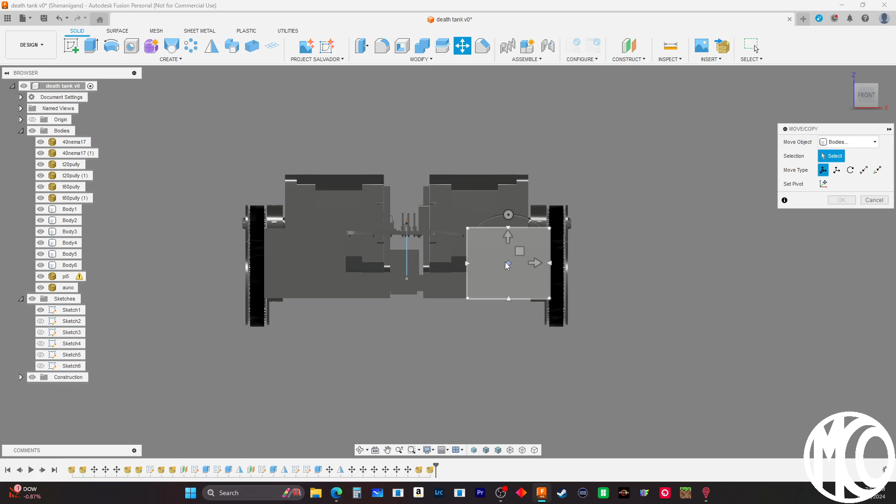That is not going to fit in with our batteries. The only way that will fit with our batteries is if we turn our batteries. Well, we can bring our batteries out even more, so we can bring them out to here because this is where the outside wall is going to be. So we do still have room. So what if we... that's at 90, okay, we're okay on that. And let's move our batteries out even more.

Ramon, how you doing my friend? Hi Bushmaster, welcome in. Yeah, I'm on for, well no, I'm not on for another 30 minutes. I'm on for about another 10, 15 minutes. I usually try to end it by 3 o'clock.

Oh, really? Does it? I looked at orange pis, but the ones I've been finding with orange pis are very expensive.

Oh darn it, undo that. So that's, we can also move the battery this way. That will give us room. We'll take it up to there, and we can bring it out, say out to here. Let me have some cushioning. So that's 10-4.

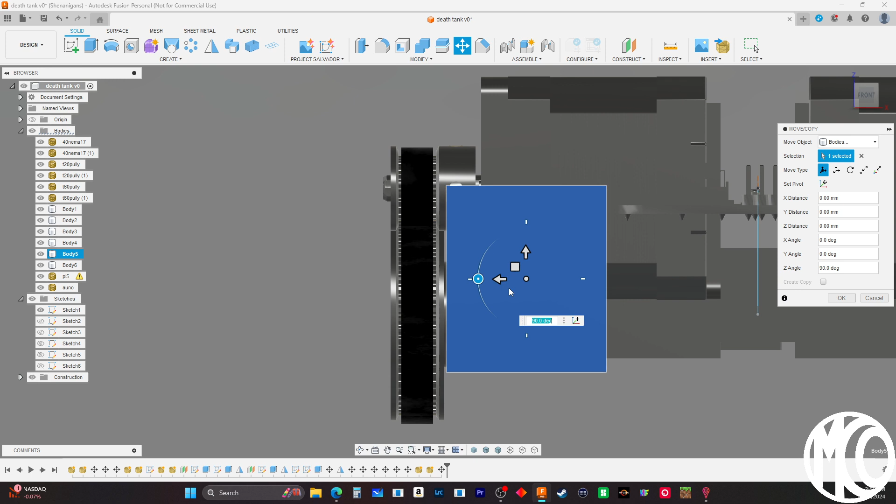Yeah, but there's the orange pis, so I have no problem with going with an orange pi. Is that battery? Yeah, that battery's up, but that's okay. I've never played around with the orange pi before, I'd kind of like to try it.

10-4, so okay, so this is our Arduino. We'd want to rotate this, so I have access to these if needed.

The AI module, yeah, I noticed it's available as a USB. Oh, did they drop all the video?

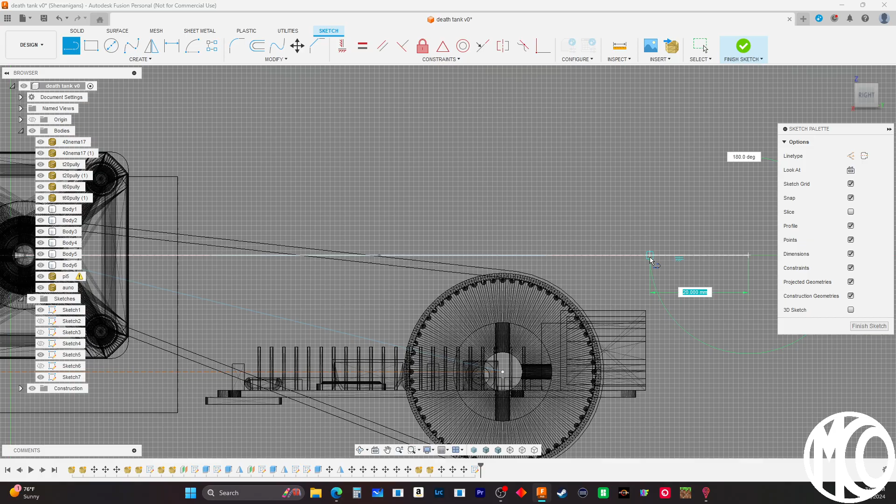We do have a little bit of room back here. How much do we have back here? This is... alright, so we can come back like 10 millimeters.

I want this body to print as one piece, so if we come back 10 millimeters, okay, now we're good on that. We're good.

Can we run that AI on the 3B? Because I have one sitting right here in front of me. Now this is a 3B, it's a 3B plus or 3B something. Raspberry Pi 3B plus. No, this is just 3B version 1.2, it's not a plus.

I think we have everything all mapped out. What if there's a model of that on... oh crap, I closed out my thing. On GrabCAD, but what if there's a model of that LiDAR on there?

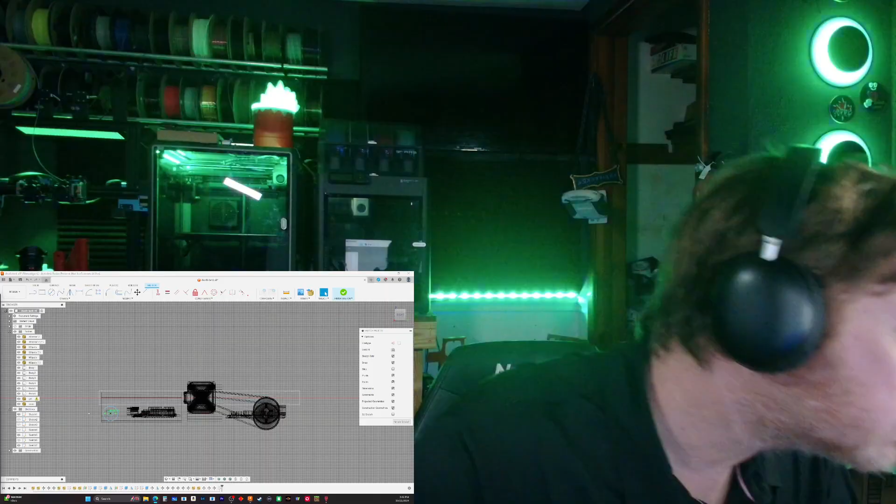There are models on here. Oh, is that it? That looks like it. Please have an STL. You do.

The 400 will be okay for all that.

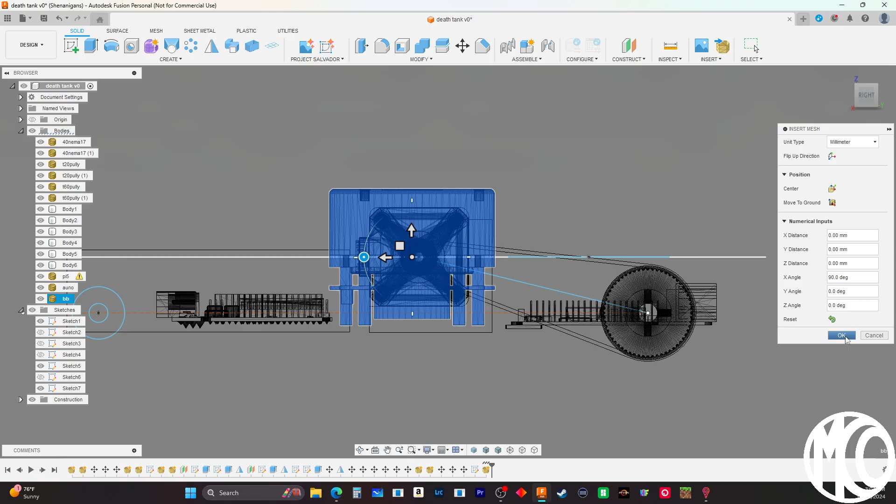Import. We might have to do some removal of components. And I don't, probably something like that.

That stays within, our tank will come up here. These supports, we can shrink these supports down.

I don't think this LiDAR is directional, as far as I don't think it needs to be a certain way. I think we can do all that in coding.

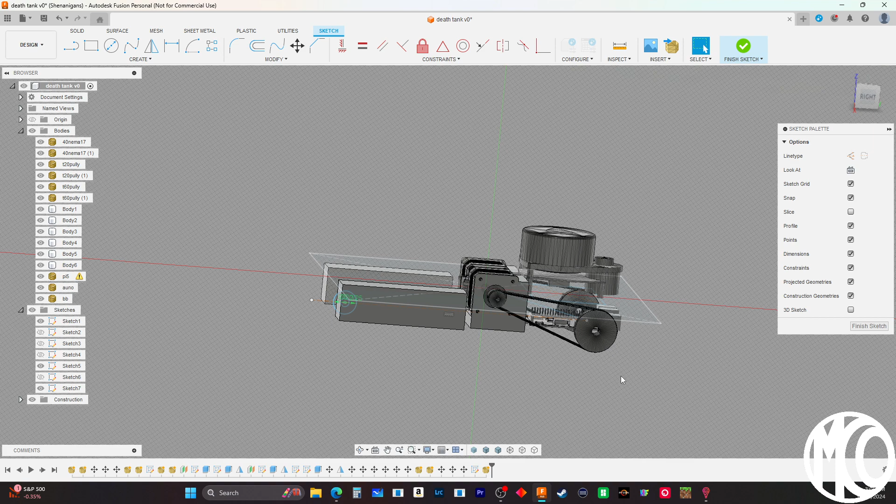So I think we have all of our components. The only thing we don't have in here is we're going to have the Pi, or the Pi hat, or the AI hat was going to go in here. Our cameras, but we can figure out the cameras later. And then we're going to have our Arduino here with an H bridge.

We might have to do a dual stack of the H bridge though, because we're going to have what, 6 servos or 6 steppers. We can do an H bridge that has 4, and I think we can double stack the four stepper one. It will give us a total of 8, so we'll have 2 stepper channels left over. What can we do with those?

As a Pi-hole for a while before we did the server.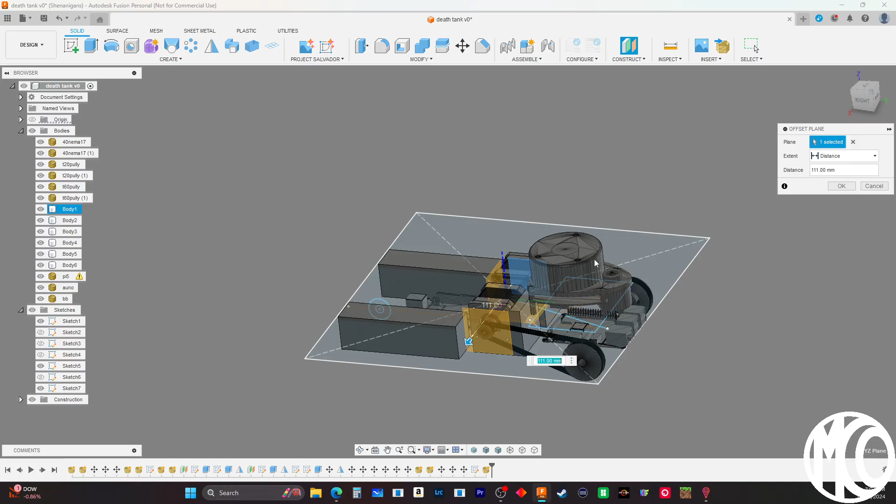So we are going to be, let's finish that sketch. I'm going to be adding, well for the tires, you know what we should probably do? Let's go to this. We'll say they're about right there.

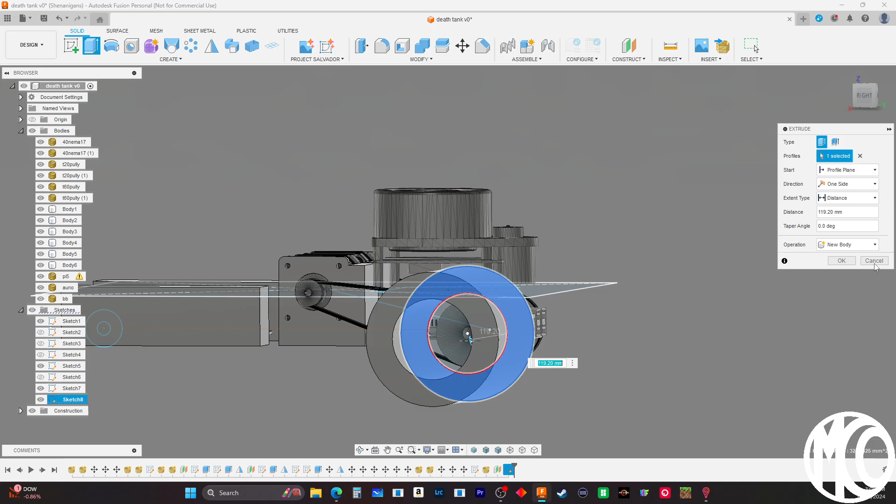This I'm going to be removing, this is just to give me an idea. So that's basically going to be our sprocket. Maybe not that thick, definitely not that thick, but that's going to be our sprocket.

Let's move this back down.

I just realized something. Yeah, I just realized something.

So this is how I want the track to go, but I wanted to try to keep this all nice and even down here. I want the track to come out. I guess we can do it right here.

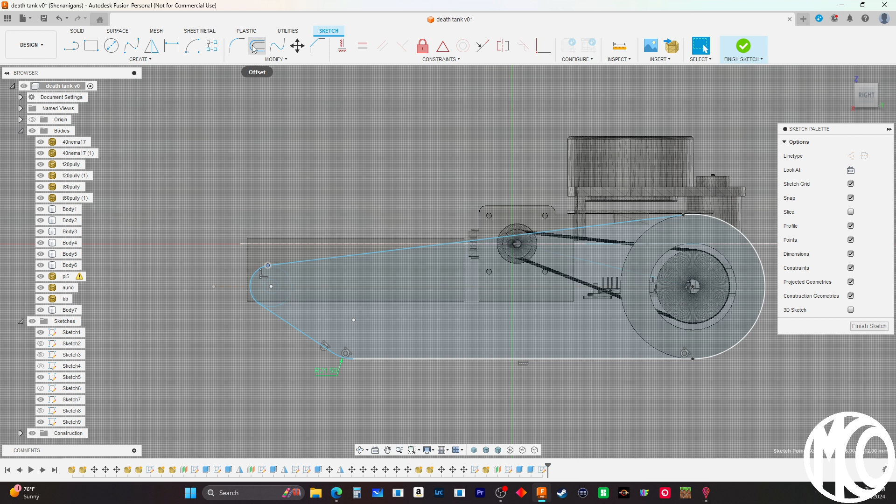Let's do an offset. So something like that. And we'll run some carriage pulleys up here, and we'll run a pulley here. This will be an idler pulley. We can A-frame that. We can run an internal structure here and have that internal structure attached to the body.

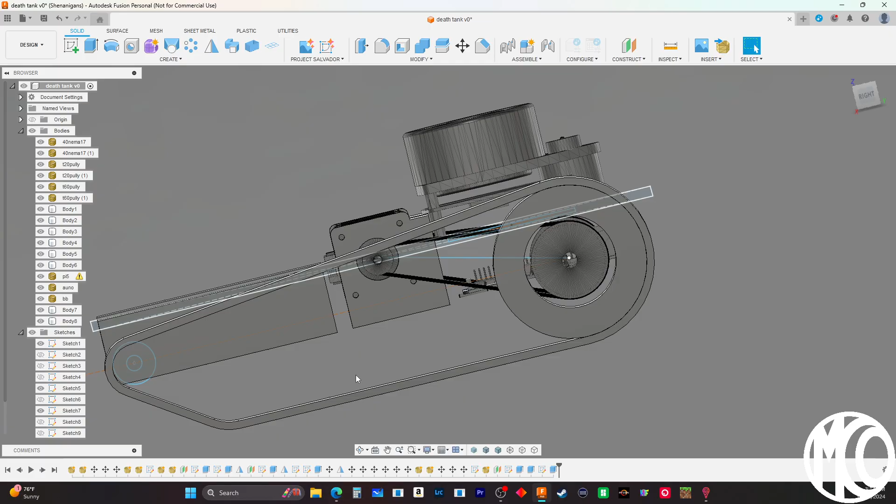I realized something, we don't have a way. We put screws into here. How are we going to screw that with the battery there?

We can run a screw right through here and into there, so we can have two here. We'll have probably about 10 millimeter thickness down here. No, so this isn't the base of it. We'll still have a shield down the bottom, so I guess we can run a shield through there.

Exactly, screwed in the battery. What can go wrong? I mean, you all want fire, right? So that still keeps it on the build plate. So yeah.

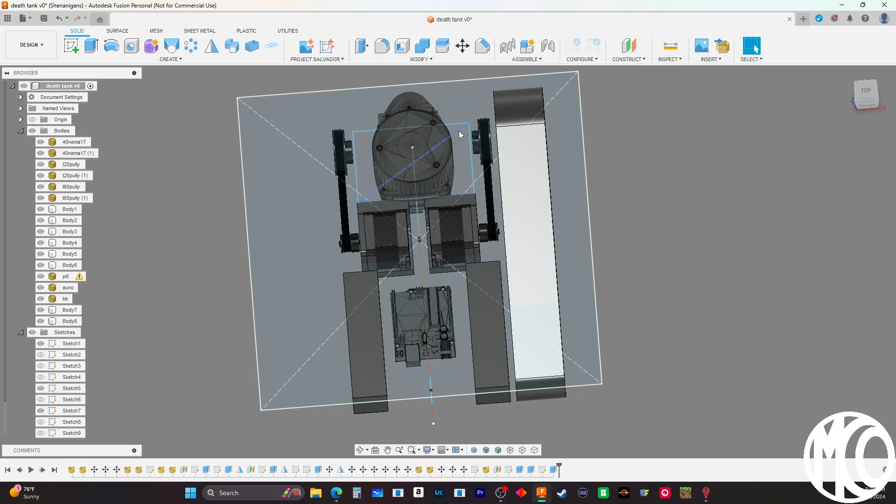We can also, with the body here, we didn't even think about this, I just now realized, we can have the body printed with inserts coming out of it. So this unit here goes onto the body, and then we can screw into those tabs. So that will work. But this is going to be an interesting project.

This whole section here is modular. We can make these modular for other motors, but I think this will work. I think we're good to go. I think we're good to start designing the body of it and start printing the body out.

Where's the fire? Well, this part here is going to be modular. You'll be able to pop a different plate in. So if you want to put a flamethrower, you can put a flamethrower on it. We'll do a flamethrower for it. We can't take that to any kind of events, we'll probably get kicked out. Probably.

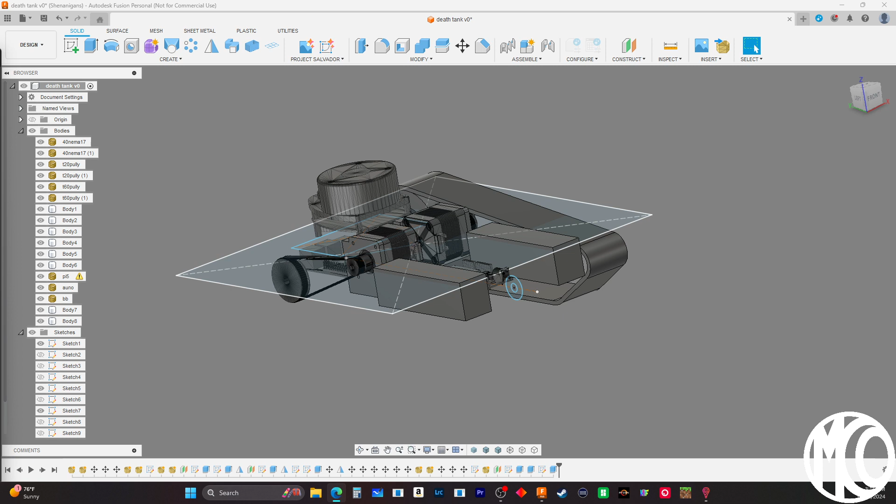So let's get rid of the sketches. Let's go into, let's do a render of this real quick.

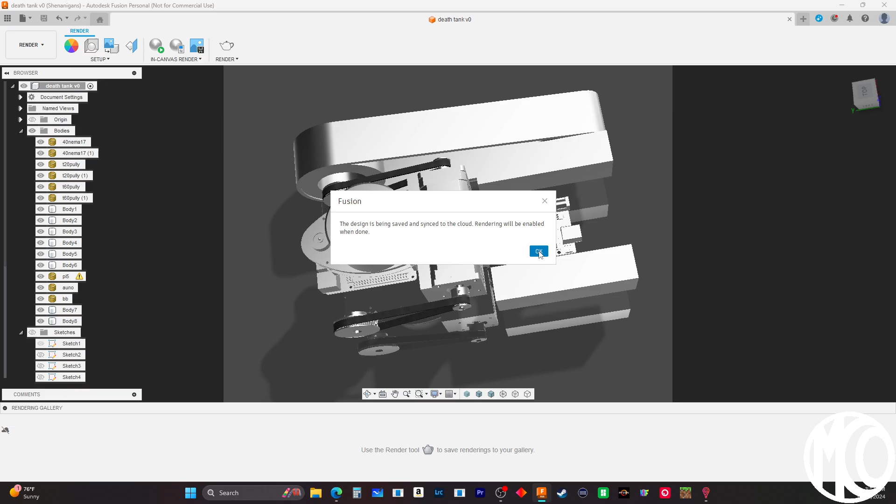I saved it. Oh yeah, BB shooter module. Yeah.

Why is the design being saved? I'm not understanding why it's... I'm not understanding what's going on here. Oh, because I'm offline, that's why.

I know, he wants to prevent it, huh? Render this.

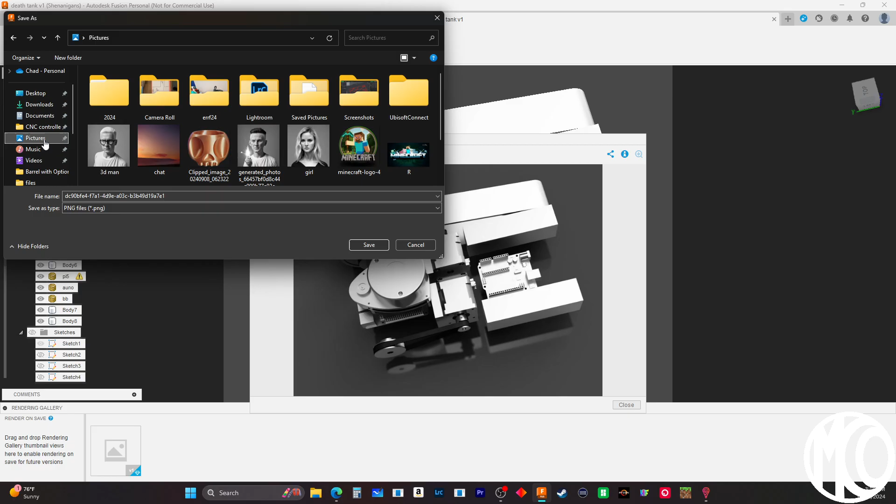We'll download this, I already know where we're gonna go. Save that in pictures, I won't even touch it up, we'll just keep it how it is. Close that out, make it into...

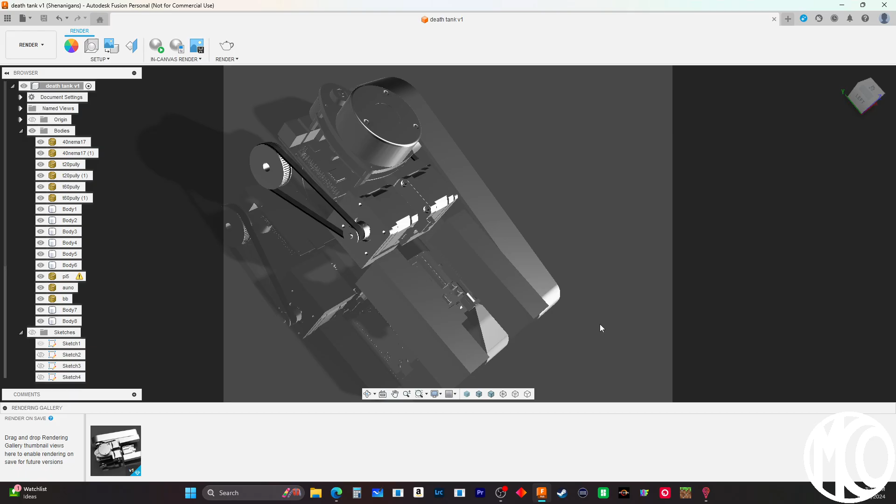Oh, download it as... oh, that's why, so we can't download it as a PNG. I should still... oh, there it is. Okay, got it.

I'm trolling somebody. I'm trolling somebody. Anyway, all right, I gotta go, I seriously have to go. My son's like...

I'm surprised he's not knocking at the door yet. What the heck? Get back to my dashboard.